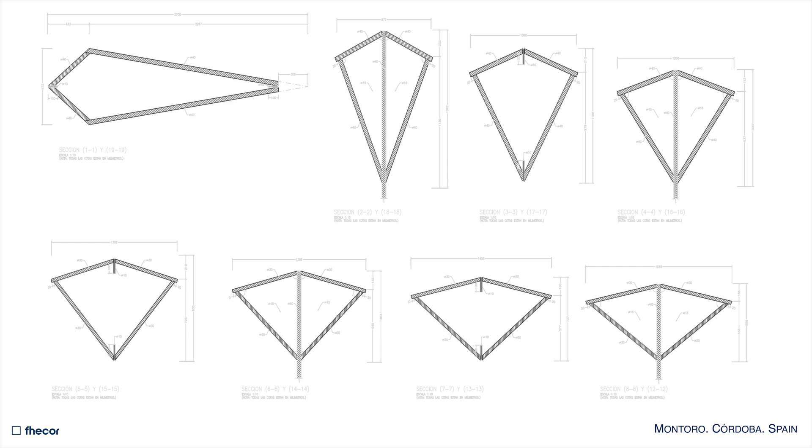This is the cross-section of the structure, and one of the important points is to have one single arch. I think it is more elegant than a double one. For doing that, we have a cross-section of the arch that changes from the springing to the crown. At the crown it is wider, so there's no lateral buckling problem. So this also created a nice shape and a structure that is more than an object in the landscape.

This is an area in Spain, a small bridge in Cabezuela, currently under construction. These are the typical bridges over the Jerte River. It is a gorge in the Extremadura area, and we had the possibility of designing a new bridge close to this, and this is the solution we made, just to try to echo these stone bridges.

But it has to be very slender, and we use here, you see, this slab that is flowing from the compression area, so it creates a kind of structural and aesthetic improvement. This is the bridge under construction now. Well, the design, I think, must be robust, and not only in technical terms, but socially and culturally as well.

The bridge over the Piave River in Belluno, Italy, emerged from a competition for building a new structure that would replace this provisional bridge. I think it was standing for 20 years or something like that, but it was provisional. So there was a competition to build a new one. We won the competition with this solution, along with architect Alberto Campo Baeza.

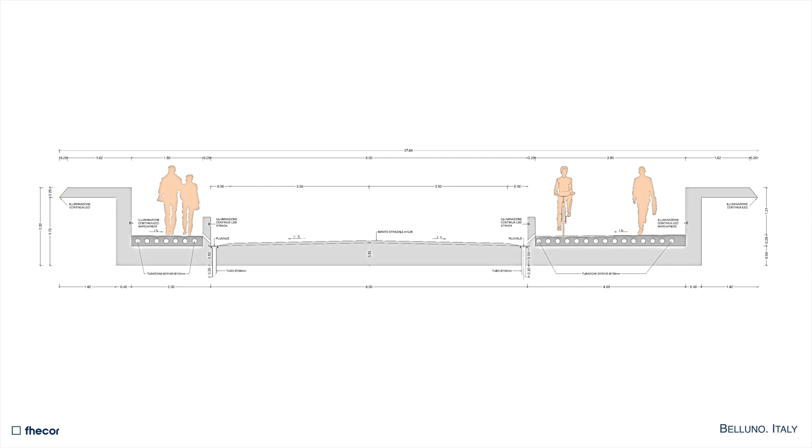Looking at the jury report, this structure won mainly because we have no elements above the deck. So this is the cross section of the solution. You see, it's mainly two lateral beams, and this is the elevation. And oops, we move to this.

Following Italy, we had the chance also to win another competition, this one in Tuscany. This bridge is the Buriano. It's a medieval bridge. You see, it's still carrying lorries and trucks and traffic. And the province, well, they are very proud of this bridge. They say this bridge is in the back of the Mona Lisa by Leonardo.

The Arezzo guys claim this because Leonardo was in fact in Arezzo, escaping from the Medicis, and well, they claim that. So they are very proud of this. So they prepared a competition to do another bridge very far from the old one in this, let's say, clean landscape. This is the Arno River, the same river as Florence.

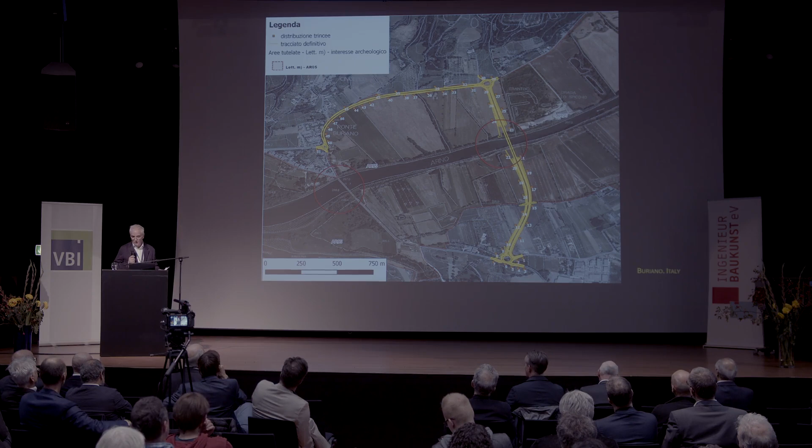And they decided to do a bridge about 1 kilometer away. So this is very good, I think, because it's in a rural area. And we won the competition too, doing something, let's say, discreet in a way. So you see here the design. It's a beam, really, where we eliminate part of the material which is not needed. So in this area where the shear is mainly going through the inclined arm, you don't need so much material. So we won the competition, and the construction of this bridge is starting in the next months.

To finish this part about landscape, I have to say this is a project for a competition that was not built. We won with a team from Portugal, Adão da Fonseca, one of the biggest, nicest designers in Portugal, with also another Spanish company, EDM. And I think this reflects the elegance that characterizes the Portuguese way of designing. And remember that elegance comes from Latin, eligere, which means to choose carefully.

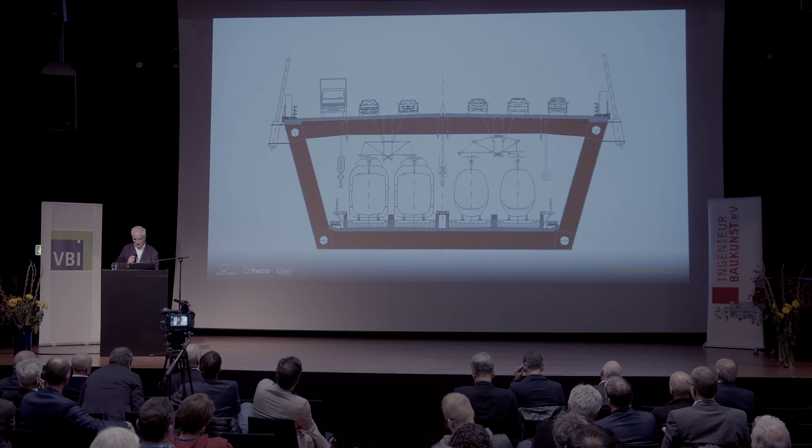So this design, mainly driven by our colleagues from Portugal, you see, is a complex bridge of 2 levels, 6 lanes on top and 4 tracks on the bottom. And this is the image of the proposal, 550 meters of central span. Also, you see some small things: the trusses that are very complicated are in dark, just to avoid seeing this mess of different elements.

So the landscape, the territory, is our field of practice. It must be interpreted with care and respect, understood beyond its physical form through its genius loci. We must employ our human lens to decipher its deeper meaning.

Point 2, towards new functionality. Well, today in Spanish cities and elsewhere, there is an inversion of values. What is technical, assumed to be well resolved, matters less than the shift towards mobility at a more human scale. No more is a bridge from A to B. So, for instance, in this project in Zabalgana, in Vitoria, in the Basque Country, we introduced 2 access points on one side and one on the other, where the pedestrians were clearly coming from.

This is the structure. It's just a beam with some cables below, in the area of disembarking. And you see here the opening day, a U cross-section that we use very commonly, with this external shape to avoid longitudinal reinforcement, and also to break the massiveness of the web.

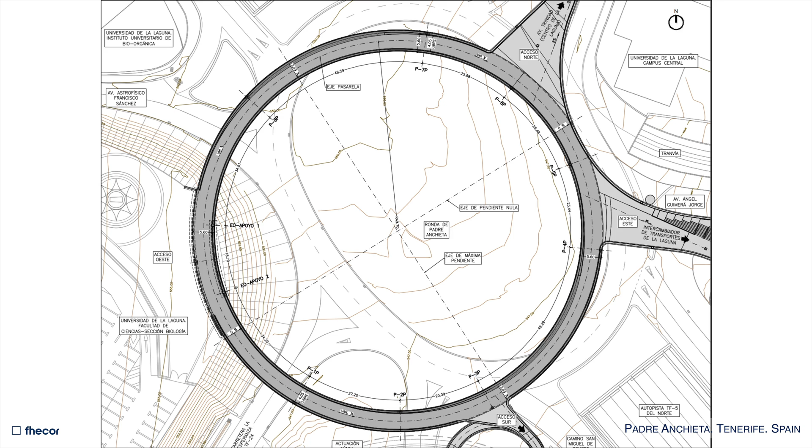Well, another project, this is more complicated. This is in Tenerife Island. It's a connection of 6 different axes. This was also a winning competition, as was the former one. And here, I have to say that it's just too complex to connect different points, and I think access points, ramps, vertical circulation, resting areas, railing, lighting do more than serve a function. It's the way the users perceive the world.

You see here that it was in a very complex area, so we can put the columns inside or outside depending on the position, but it's very stiff on torsion, so we don't have a special problem.

Here we have the father, Padre Anchieta, who gives the name to the footbridge. He was the founder of Sao Paulo in Brazil. So one of the key points was where to put the statue, which has a value, and so we found this place. This is under construction at the moment, and this will be the final view of the project.

So this new functionality demands innovative solutions. Designers must go beyond the structural, applying the human lens to respond to functional demands and detailing.

Point three, engineering palimpsest. Well, what is a palimpsest? A palimpsest is a writing surface that has been scraped so it could be used again, while traces of the original writing remain visible beneath the new text. In our discipline, palimpsest describes something that bears visible traces of history, where past and present coexist in a layered form.

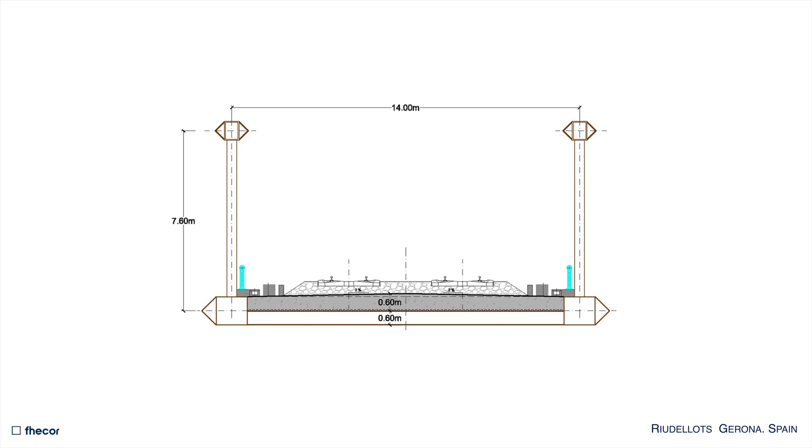For doing this type of structure, it's always difficult. In this case the solution was to have a structure that can be launched without cutting the traffic. Here you see the cross-section. This is a high-speed line, so to have enough resistance to buckling, lateral buckling, we have this wide chord beam on top.

Here you see we have the top chord, and this is during launching. You see the structure, here you see the weldings. I'll go with you, it's good to see how it was built. You see the weldings at the different positions. And this is the bridge as it was finished, and this is in operation.

Sometimes these palimpsests, nowadays, well Spain is more or less built I would say, but we have some new challenges, for instance to build cyclist or pedestrian bridges. In this case, in this mesh of highways crossing at different levels, this is in the Basque Country, we have the chance to design some small bridges.

So there are small ones to human scale compared with this, I would say, brutal building structures from the dictatorship era where we had the boom of construction in Spain. So we have this experience of doing something closer to this human lens.

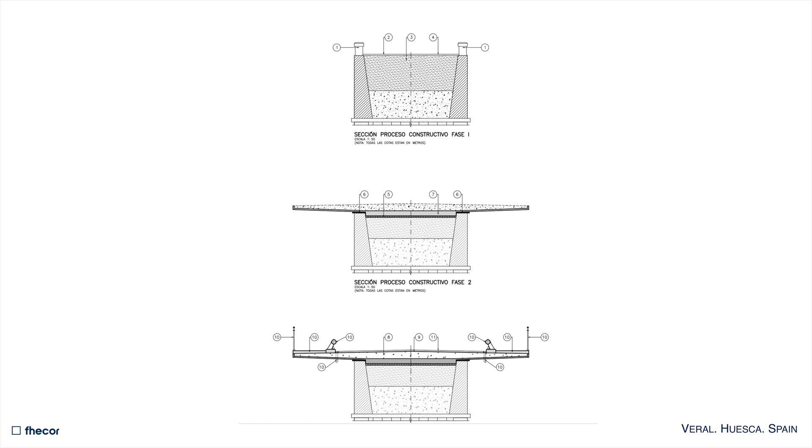And I will finish with working with existing structures. We have in Spain a lot of structures with heritage value, and in some cases we need to widen them. For instance we have this bridge, we use the resistance of the material, they are very strong, able to carry the new loads. So in this case, instead of demolishing or building a new bridge, just adding a slab on top, we can do this.

We maintain the lateral beam, the lateral truss, as it was, with no problems. Just to finish, because I only have 2 minutes I think. Well, some of our signature bridges had to be widened, or in this case, it's a bridge in El Centenario.

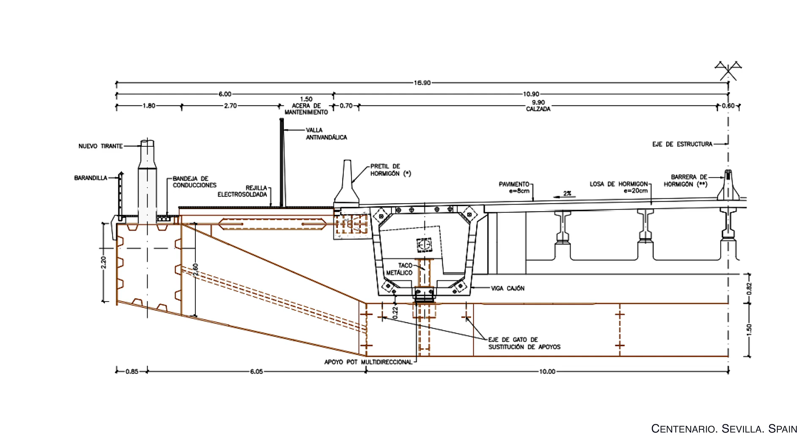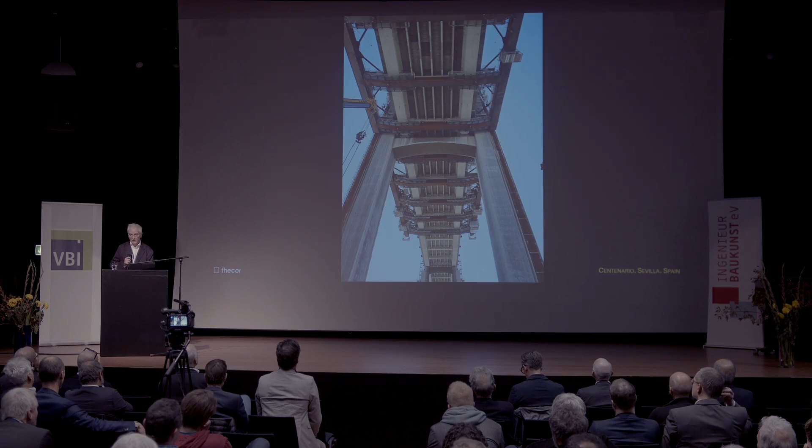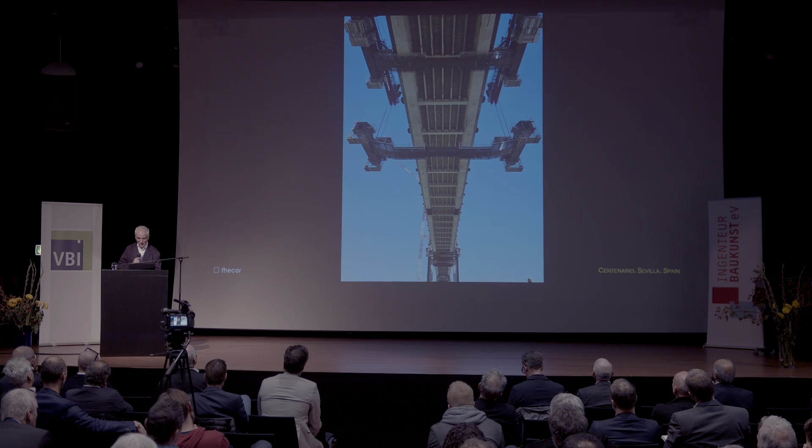So this is under traffic, and this is what we expected to see at the end of the work. Just to finish, working with existing structures requires studying historical methods. Applying the human lens, technical understanding is essential for success.

Just the conclusions, because it's time. We invited a writer to discuss bridges last summer at a university with my FHECOR Foundation. His talk was about bringing back the beauty. He stated this phrase: a bridge is an amendment to nature, a correction of nature, and therefore you, engineers, are obliged to make your bridges beautiful. Nature cannot be corrected with ugliness. Thank you very much.